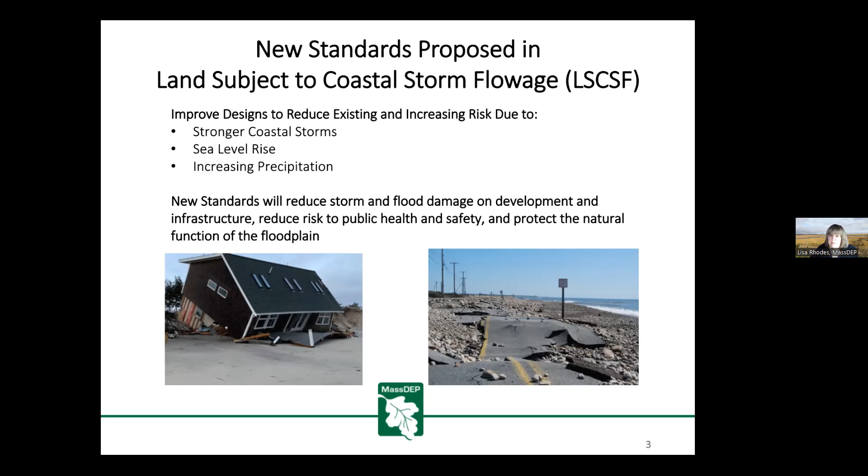Next slide. So just to quickly go over the need for these regulations, they're intended to improve designs to reduce existing and increasing risk due to stronger coastal storms, sea level rise, and increasing precipitation that we've been seeing. The new standards will reduce storm and flood damage on development and infrastructure, and it will reduce risk to public health and safety. And most importantly, for these regulations, it's intended to protect the natural function of the floodplain to help provide these functions. Next.

And so some of you may know that we've been working on developing standards for the land subject to coastal storm flowage for many years. It's been a wetland resource area in the wetlands regulations since the very beginning, but we've never had specific standards for it. And it's becoming more and more important to have that. And we've learned over the years that having strong standards in land subject to coastal storm flowage is not just environmentally important, but it makes economic sense, and it's important to maintain the high economic status of Massachusetts.

And I refer to an article in Commonwealth Magazine in October of 2022, where they referred to the big three credit rating agencies that had mostly good things to say about the Massachusetts economy, but pointed to a vulnerability based on our potential for coastal storms and flooding in Massachusetts. And specifically, they referred to the S&P rating in 2022, where they said that they consider Massachusetts environmental risks moderately negative in the credit rating because of coastal exposure, specifically in the combined Boston and Cape Cod area, exposing the state to significant economic disruption following a high impact event.

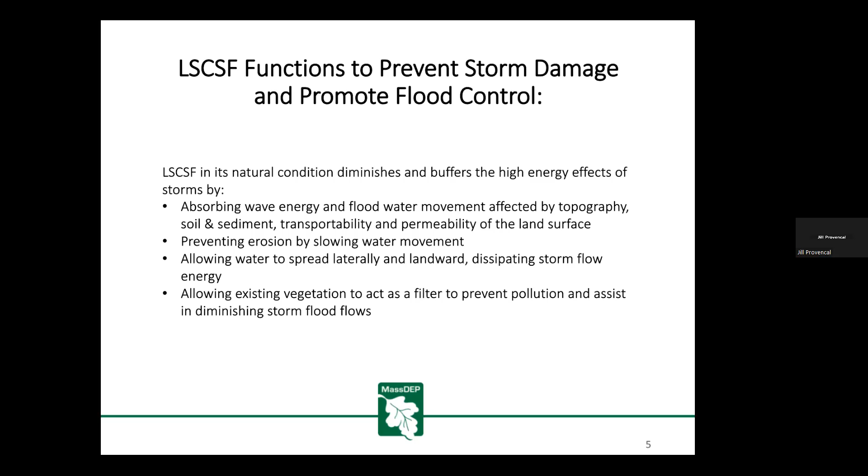Good evening, everyone. So as Lisa mentioned, land subject to coastal storm flowage is a coastal resource area that has the ability to diminish and buffer the high energy effects of storms by absorbing wave energy and flood water, reducing erosion, and dissipating storm flow energy. So the LSCSF standards are based on the FEMA flood zones.

So within LSCSF, we have the velocity zone, or V zone, that's also known as the coastal high hazard area. The V zone boundaries are determined by reference to the currently effective or preliminary FIRM map prepared by FEMA. And these areas are subject to high velocity wave action from storms and have a projected wave height of 3 feet or greater, or at least 3 feet of runup.

Then landward of the velocity zone is the MoWA, or area of moderate wave action, also considered a high hazard area of the A zone. These areas experience wave heights between 1.5 feet and 3 feet, storm surge, and wave runup.

And then landward of the MoWA is the MiWA, or area of minimal wave action, also located within the A zone. And this area is considered the lower hazard portion of the A zone and is subject to wave heights less than 1.5 feet during the 1% annual chance flood. And then the boundary you see here is the LiMWA, or limit of moderate wave action, and that is between the MiWA and the MoWA.

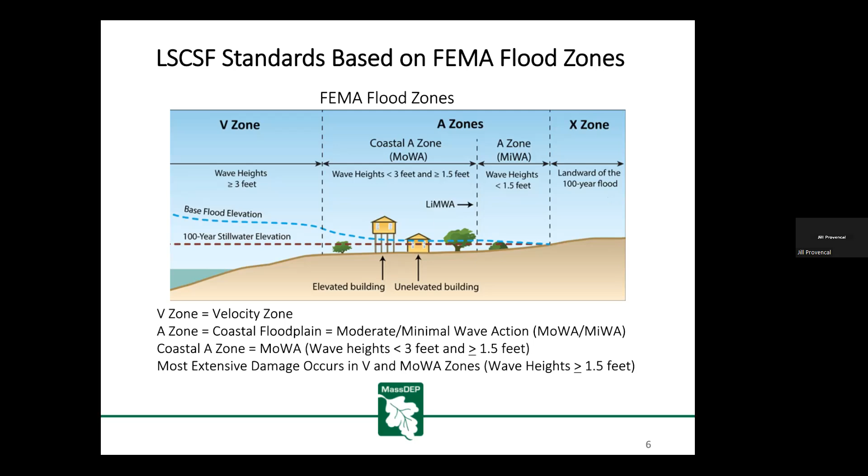And one thing I want to note is that the complete up-to-date LiMWA lines are only available through the FEMA Flood Map Service Center as part of the National Flood Hazard Layer, and they are not shown on MassGIS or other state viewers. And then we have the area landward of the MiWA, which is the X zone. This area is currently not located within the FEMA 1% chance floodplain.

So areas along the coast of Massachusetts primarily consist of protective coastal reservations, natural wetland resource areas, and rural to highly urbanized development. And each of these areas, regardless of its present landscape, is subject to erosion, scour, and damage from coastal storm events. So, learning from past storms.

One source we look to is FEMA's Mitigation Assessment Teams, or MATs, who conduct engineering analysis after major natural disasters to assess damage to government facilities, homes, businesses, and other structures, and determine the causes of structural failures and successes, with the goal of learning exactly what happened and why, and how to reduce disaster damage in the future. What we can take away from this analysis can assist us in how we look at rebuilding efforts, new construction, building code policies, and regulations.

So in certain areas, and this is from Hurricane Sandy, the MAT found that flow channelization tends to be highly localized, and changes in elevation can facilitate flow channelization. So in this figure, the MAT report identified flow paths A, B, C, and D coming in through here. This is flow path A coming in through here, and flow channel A resulted in washing this house back into the bay.

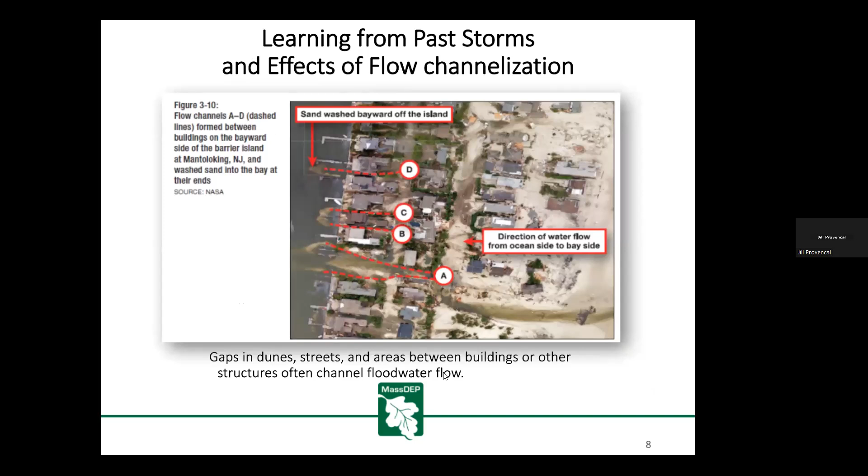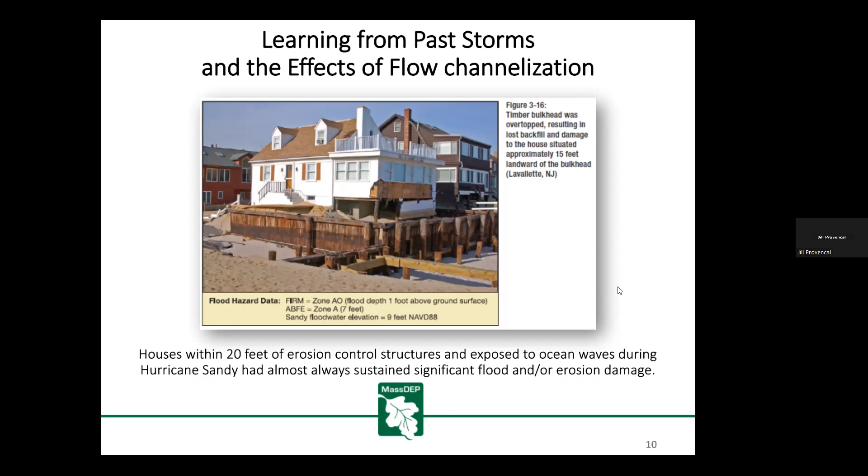And then flow channels B, C, and D, you can see this home here. These flow channels resulted in undermining foundations and causing the collapse of houses through these channels on the side. And the Hurricane Sandy MAT also found that buildings within 20 feet of erosion control structures exposed to ocean waves almost always sustained significant flood and/or erosion damage.

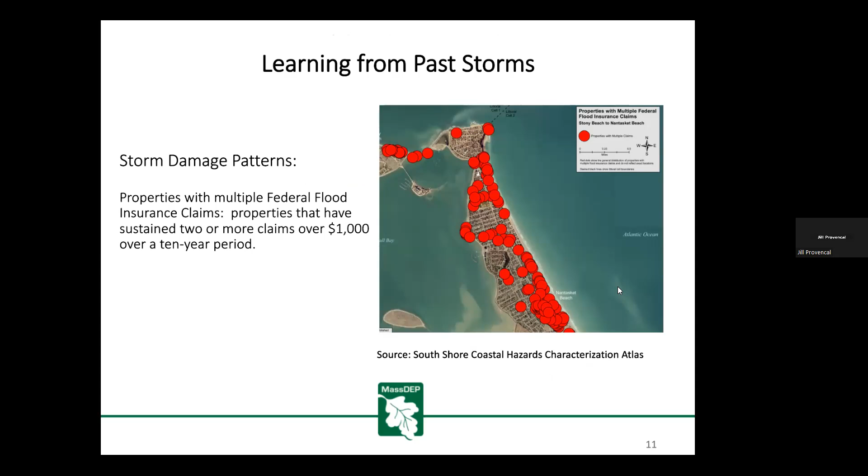Another source that we use, including but not limited to, is the federal flood insurance claim maps, on which we can see areas of repetitive damage from storm events. So before I pass it on to Pam, I just want to say, observations, including but not limited to those documented by FEMA, MassDEP, and through our Mass Coastal Storm Team, as I mentioned, we've been a little bit busy the last week or so, are reshaping how we think about development and redevelopment within LSCSF.

And we really are hopeful that through these draft regulations, we can utilize what we have learned and adapt and change past practices within LSCSF and focus on utilizing this resource area and other wetland resource areas to our advantage by restoring and preserving its capacity to provide storm damage prevention and flood control.

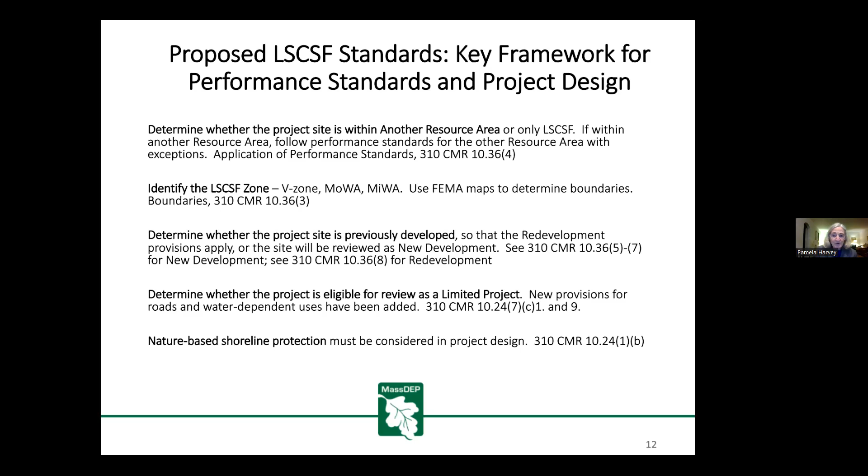Okay, so this is the provision that covers the question of what performance standards apply. You'll find it at 310 CMR 10.36(4). The basic rule is that where land subject to coastal storm flowage overlaps another resource area, you apply the performance standards for that other resource area, except for these important standards, the first two that go to the elevation and height of buildings, and importantly, a prohibition on new buildings in the velocity zone, even on open piles. And within the moderate wave action area, buildings have to be elevated under the building code for the other resource area, dune or barrier beach, or under these standards, whichever is higher. So that elevation standard applies generally, even if there is an overlapping second resource area involved.

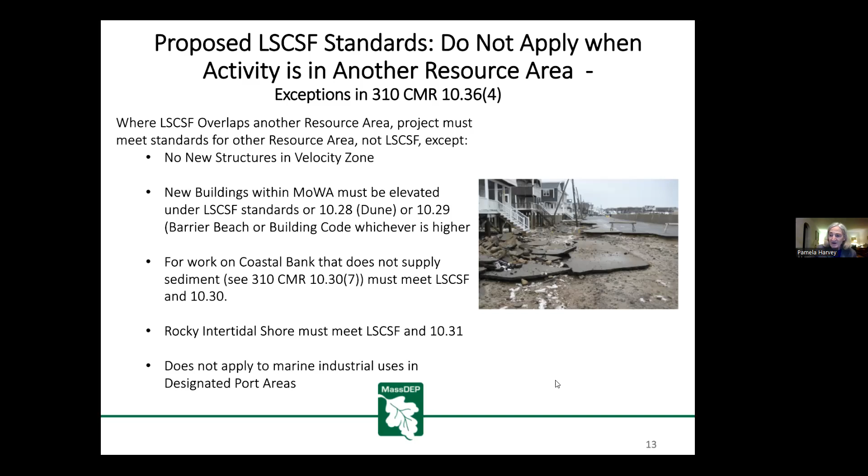And then three other circumstances. There's a particular provision about coastal bank, at 10.30, where coastal bank doesn't supply sediment, and in that circumstance the land subject to coastal storm flowage performance standards also will apply. The same anywhere within a rocky intertidal shore; both standards apply. And finally, the standards do not apply to marine industrial uses within a designated port area. Next slide.

Okay, so the regulations are set up consistently with the other coastal resource areas and the inland ones too, though these are specific to land subject to coastal storm flowage, beginning with a preamble that explains the functions and characteristics of this area and the effects of development, which Jill gave an excellent overview of, then the characteristics of land subject to coastal storm flowage, and then the presumption of significance to flood control and storm damage prevention.

And the significance is presumed within the velocity zone and the moderate wave action zone. Again, those are the areas with extensive wave energy and where the impacts are greatest. There is a definition section in this at 10.36, which again is our new portion of the regulations for this resource area. And there are some terms that are only used there, so we've added some in.

It's important to note that there are terms used which are also defined in the general definition section at the beginning of the regulations, and also in the beginning of the coastal regulations. So you may need to look in more than one place to find a definition.

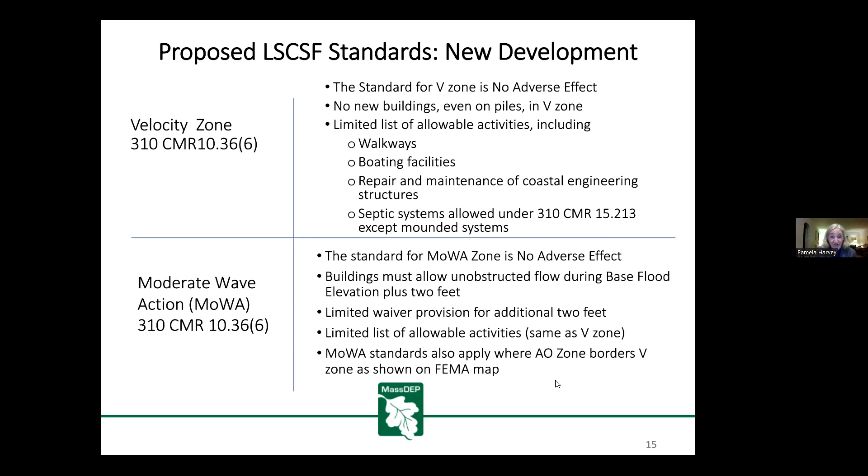Where buildings will be allowed, there are some additional provisions that go to being sure that the building is set back as far as it can, to try to have permeable surface, and so that there's as little disturbance to the vegetation on site as possible, to try to keep the resource area and preserve its flood control functions. Okay, next slide.

Okay, now we're in new development or undeveloped sites, and for the minimal wave action zone. Again, this is where waves are less than 1.5 feet. And here, buildings do have to be elevated. This is also true under the building code. They have to be elevated on either piles or solid foundations.

And there is a provision that would allow the issuing authority, if there's a lot of wave action on the site and when it's close to another resource area, to require elevation on piles. But often in the minimal wave action zone, they'll be elevated, but on solid foundations. And then there are some other performance standards for the minimal wave action area.

Including provisions so that there won't be redirection of flow, and there's also some language about trying to avoid, where there's a circumstance with a confined basin or other topographic feature that's going to hold flood water, to be sure that its water is not routed there. Any kind of circumstances where there would be an impediment to return flow.

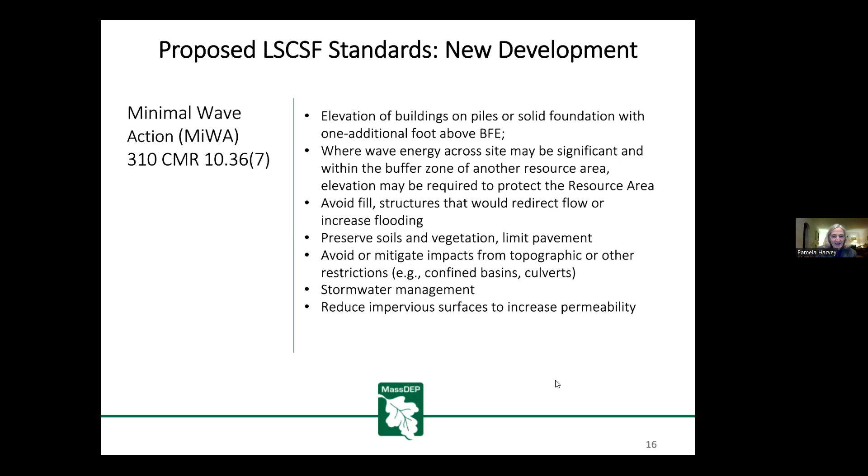Okay, turning now to redevelopment. Again, this will apply probably fairly commonly, just because of the amount of development in land subject to coastal storm flowage. The standard here is improve existing conditions, and redevelopment is just areas where the redevelopment would be replacement, rehabilitation, or expansion of existing structures.

A previously developed site would be a site with structures and fill and pavement and impediments to flow. So it's quite similar to the redevelopment provisions that we have for the riverfront area, and there are different requirements here depending on whether or not it's in the V zone, which has tighter standards, versus the moderate wave action zone. Importantly, there's an exemption for historic structures. There are additional requirements for being sure there's stormwater management.

And then also in the redevelopment section, in areas where impervious surfaces have predominantly replaced natural floodplain functions, there are two provisions that would allow structural flood control. One is for the minimal wave action zone, where there's a provision that would allow placement of fill for flood control, where they were thinking berms. And then for the velocity zone or the moderate wave action zone, there's a provision that would allow elevation of existing seawalls or construction of berms for flood control.

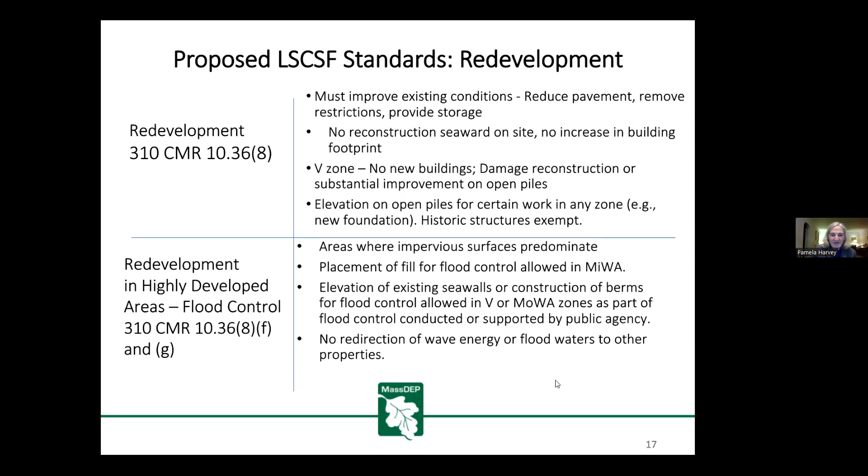Okay, just two final things on land subject to coastal storm flowage. There is a provision about salt marsh and dune migration, and the purpose of this provision is to allow a landowner to do work that would support salt marsh or dune migration onto their land subject to coastal storm flowage. So it could be within the buffer zone of those areas. We want to be sure that there's no adverse impact on those areas or on neighboring properties because of this work. But again, it could be a passive or assisted migration, depending on what the landowner wants to do.

It just seemed like there was an opportunity to encourage this kind of work. And if property owners think about it, they probably will be better off having a dune or some salt marsh because of the buffering capacities they offer, rather than just open lawn or other things they might be doing with their land subject to coastal storm flowage. They get more protection of structures through salt marsh or dune. And then finally, there's a provision for protection of rare species, which is the same as in the other coastal resource areas. Okay, next slide.

Hey, Pam, need to do a time check, maybe 3 more minutes. Okay, yes, I'll be very quick here.

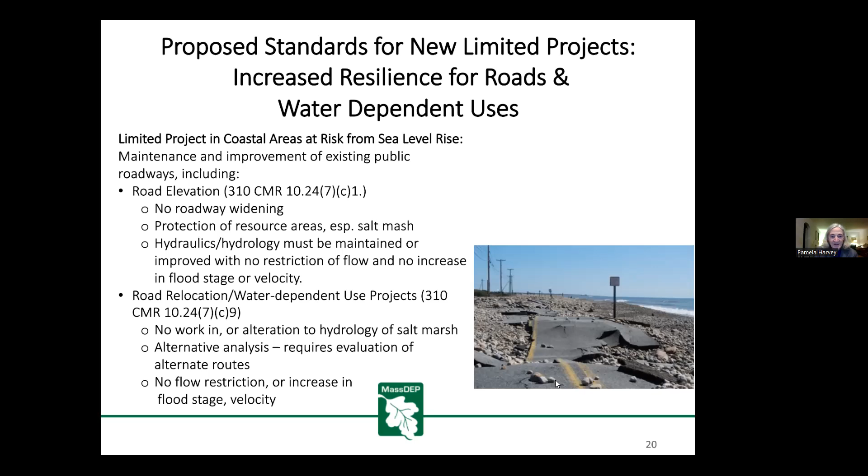Okay, next slide. Okay, last but not least, we have a pathway for research on climate resilience. There was an interest by the scientific community about a provision that would allow this work to go forward and have a particular regulatory pathway for it. So we did establish this. Those of you who are interested in doing scientific research, you should take a look at it.

There's a fair amount of detail in it, and it has limitations on the scope of impacts and the duration and requirements for the ability to do restoration if things aren't working out as planned. These are provisions that are in the early part of the regulations at 10.05, so you'll find them there. Okay, that's the end of my session. Next slide.

Thank you, Pam. So just a quick update on the schedule. As you know, we published these proposed regulations on December 22nd. We have one more info session on January 23rd at 1 o'clock. And then we have 3 public hearings scheduled for January 31st and February 1st, where we will just take public comments. The public comments are due on March 1st. So we want to provide enough time for people to look through everything.

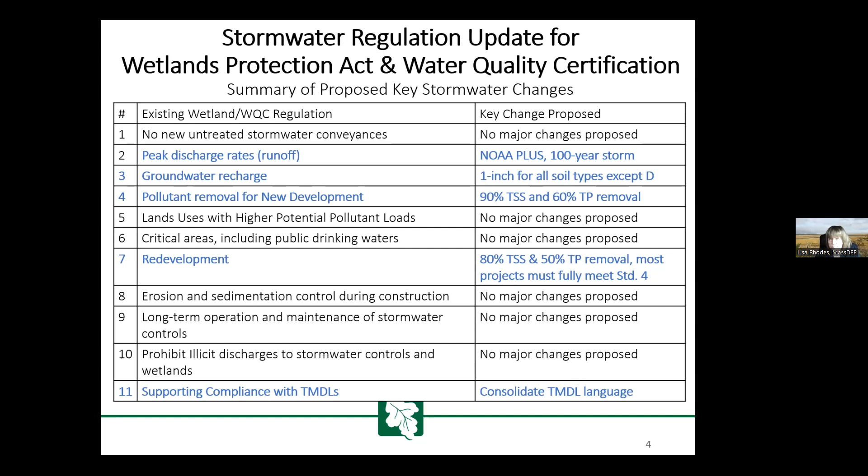These are the stormwater standards. If you're familiar with them, there's currently 10. The ones that are highlighted in blue are the main ones that are going to change, and we'll be discussing those today. Standard 2 is for peak discharge rates. Standard 3 is for groundwater recharge. Standard 4 is pollutant removal for new development. And then standard 7 is for redevelopment. And we are proposing a new standard to improve protection of waters that currently are assigned a designation of total maximum daily load or impaired waters. Next slide, Dave.

Okay, so starting with standard 2, standard 2 is for peak runoff attenuation, and the standard basically requires that post-development peak discharge rates do not exceed pre-development discharge rates. Currently, this standard is based on precipitation data that is 60 years old. It's from a very outdated document referred to as Technical Paper 40, and it badly needs to be updated. So the key proposal for this standard is to discontinue use of the TP40, the 60-year-old data, and adopt the new NOAA Atlas 14 precipitation data.

Except rather than adopting the fitted value from the NOAA Atlas or the average value, we are proposing to adopt the 90% of the published upper confidence interval as the data that you use to design for peak for this standard, and that we refer to as NOAA Plus. So NOAA Plus is the 90% of the published upper confidence interval in the NOAA Precipitation Atlas. We are also proposing to require design for the 2, 10, and 100-year storm events.

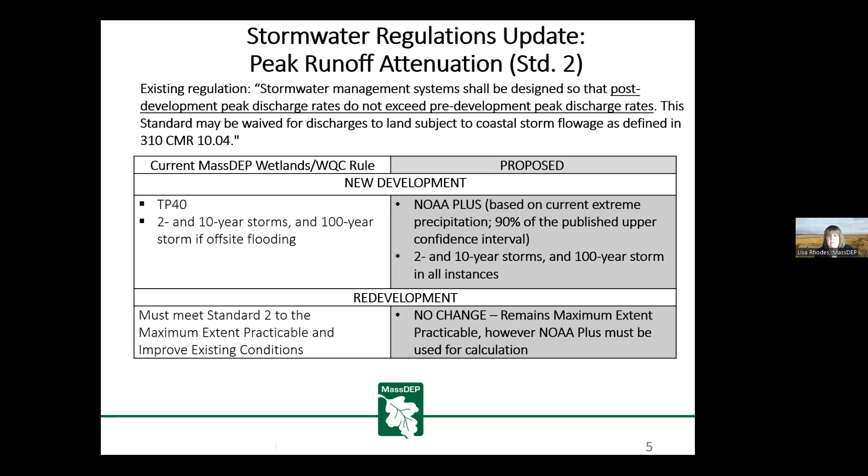For stormwater standard 3, that's the recharge standard, which basically requires that annual recharge from the post-development site shall approximate annual recharge from the pre-development site based on soil type. So the current recharge standard has soil recharge standards for each soil, A through D. The proposed requirement for new development is that A, B, and C soils must recharge 1 inch if you're using the static method. And for D soils, it would be 1 inch to the maximum extent practicable.

Additional methods are allowed to be used for the recharge standard, such as the dynamic method and the continuous simulation method. If using those methods, they would be presumed to meet the standard of the 1 inch using the static method. For redevelopment for the recharge standard, we are proposing to keep that as a maximum extent practicable standard, only it would be maximum extent practicable of 1 inch of recharge, except for D soils. And we're also proposing to allow offsite mitigation for redevelopment for the recharge standard. Next slide, Dave.

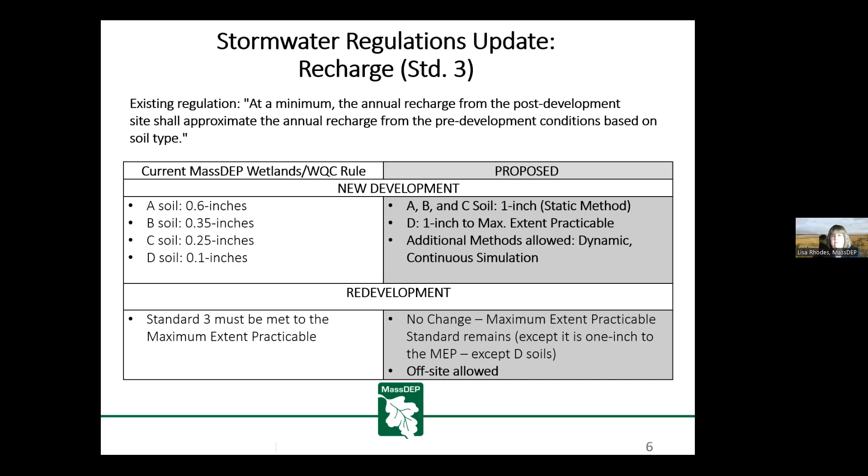Now for standard 4, this is the pollutant removal standard, and this is the one that was most important to try to align with EPA to the extent possible, so that the two requirements are similar. The current standard for pollutant removal is to remove 80% of the annual load of total suspended solids. And the proposal is to align with the EPA MS4 general permit by requiring removal of 90% total suspended solids and 60% total phosphorus for new development.

And different from EPA, offsite mitigation would not be allowed, since the assumption is you're starting from a new site which could be designed to accommodate the stormwater requirement.

For redevelopment, we are also proposing to align with EPA and require removal of 80% total suspended solids and 50% total phosphorus. And although this standard for redevelopment is currently at maximum extent practicable, we are proposing to change that and require that most projects fully meet this standard, the pollutant removal standard, and we'll discuss the reasons for that in a few minutes.

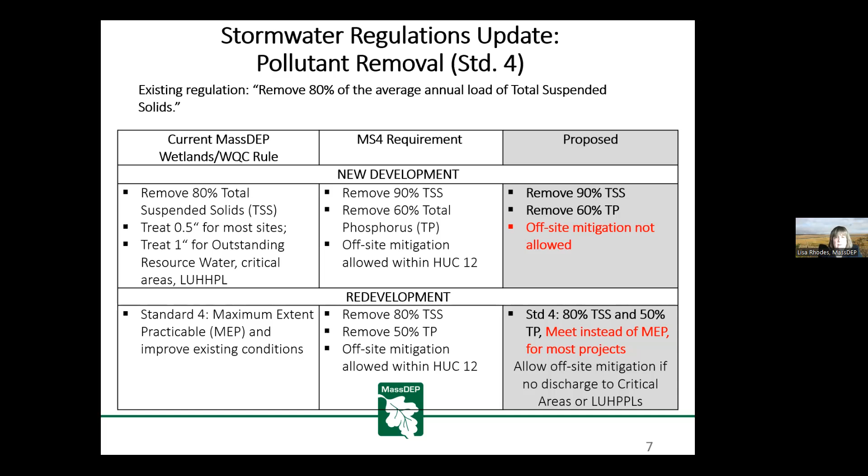Next slide. We're going to go into a little bit of a deeper dive on these standards I just talked about. I'm going to turn it over to Tom McGuire to talk about the NOAA Plus component of the peak rate attenuation standard. Tom, you ready?

Yes, as Lisa indicated, we currently rely on TP40 or Technical Paper 40. Just to give you an idea, it was put together by something called the U.S. Weather Bureau, the predecessor agency to the National Weather Service. That's how old it is. It's paper. There's about 2 or 3 isohyets, which are sort of lines of equal precipitation in Massachusetts, so it's very coarse. We're proposing to replace it with a variation of NOAA 14, which is a web-based interface.

You can get precipitation statistics for any point in space in Massachusetts, so it's much more reliable in terms of interpolating between stations. We're proposing to use the upper end, though, the upper confidence, rather than just rely on the fitted value as Lisa indicated. Next slide.

This is an example of how one would get NOAA 14 when one clicks on a point in space, let's say Worcester, Massachusetts. It comes up with it. You get a table. The dark value is the fitted value, and the two values below that in parentheses are the lower confidence to the upper confidence. What we're seeing here is a lot of the storms are toward the upper end versus the fitted value.

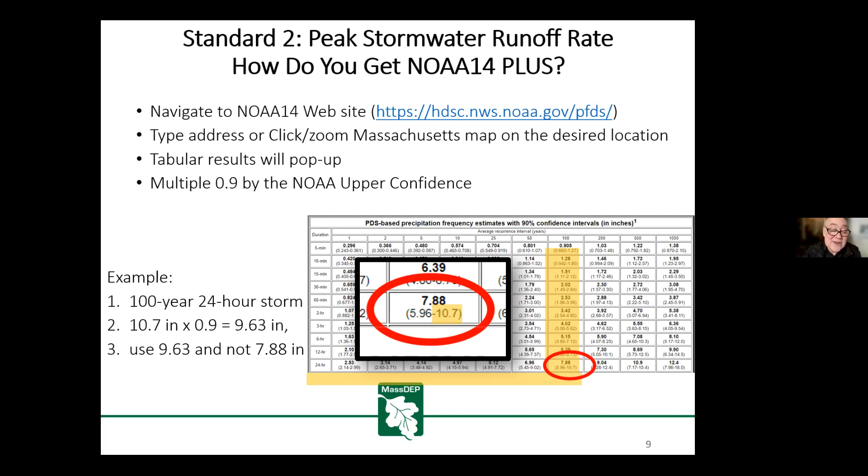We're also proposing to make the same change in bordering land subject to flooding. Right now, we rely on the FEMA mapping, and then in the absence of the FEMA flood profile, we rely on the largest event observed or recorded, and then an engineering analysis in the event of a conflict, relying on a 7-inch storm in 24 hours.

So we're proposing to keep everything the same, rely on the FEMA mapping, rely on the largest event observed or recorded, and then in the conflict, instead of using the 7-inch storm in 24 hours, we'd rely on the NOAA plus storm. Turn it over to Dave Roman now.

Okay, thanks, Tom. So now we'll go into standard 3 and talk about stormwater recharge. So as Lisa mentioned, in the current standard, the recharge depth is based on hydrologic soil groups. So for example, for the static method, the recharge depth would be 0.6 inches for soil group A, 0.1 inches for soil group D. The proposed recharge depth is now 1 inch for all soil groups, except for D, which would be to the maximum extent practicable.

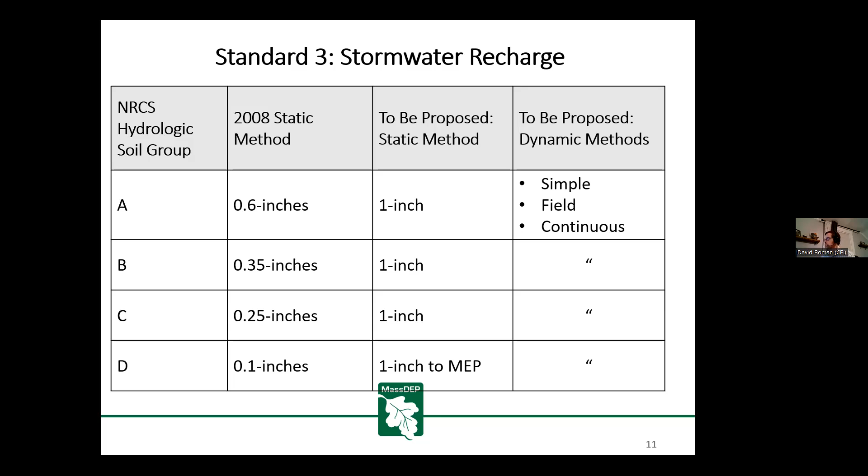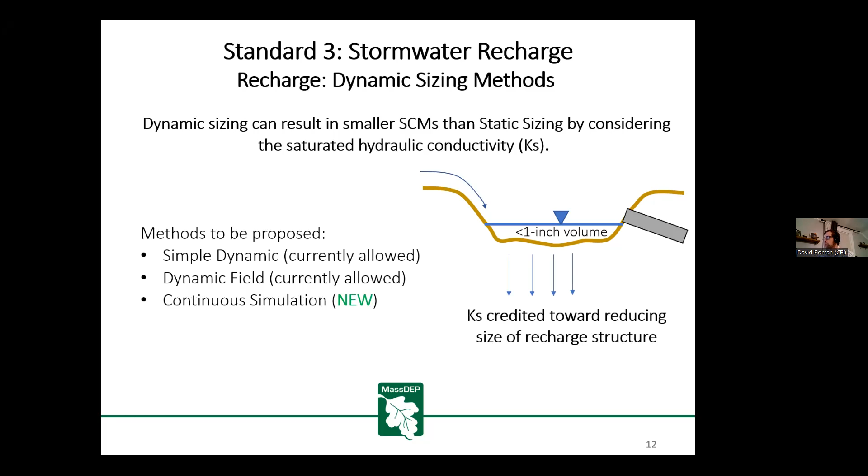There are some dynamic methods that can be used to reduce this recharge depth. So dynamic sizing can result in smaller SCMs than static sizing because it takes into account the saturated hydraulic conductivity. So the current handbook allows 2 different dynamic methods. These are the simple dynamic method and the dynamic field method. There is a proposed new method called the continuous simulation method. And this is a spreadsheet-based method which looks at long-term rainfall records and is used to size the recharge dynamically.

One thing to note is that MassDEP did look at this 1-inch target recharge value based on some questions from the advisory committee. And as a result of that, a couple of different analyses were looked at. One was the base flow separation analysis, and one was the continuous rainfall simulation. And really, the whole entire goal of this is to look and see how a recharge target can be set to mimic

pre-development recharge values. So based on this result, DEP is considering changing this recommendation from 1 inch to 0.8 inches and seeking comments on the results of these. So there's a notice to reviewers document posted on the website with more information, and you can also find those 2 analyses.

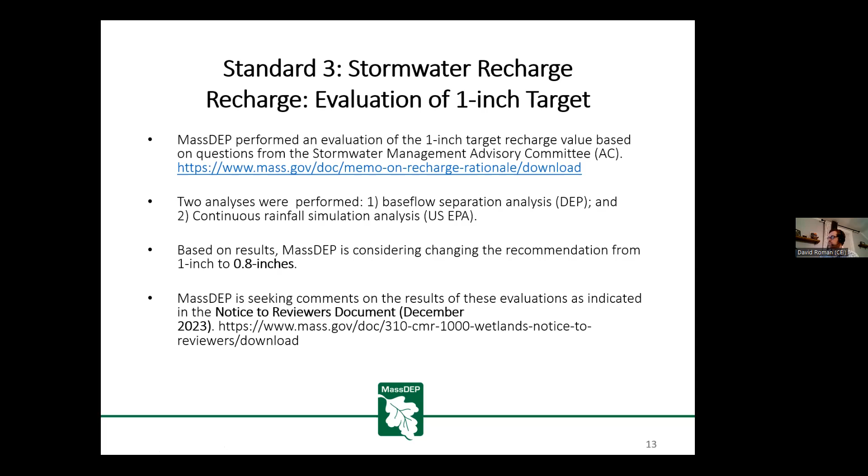And I'll pass it over to Liz to talk about Standard 4 and pollutant removal. Thanks, Dave. I am Liz Clark. I'm going to walk you through the changes to Standard 4 and the new Standard 11.

Standard 4 was changed with 2 main goals in mind. One, to improve the water quality from the stormwater runoff coming off of our post-developed, new developed and redeveloped sites. In the past 4 to 5 years, we've seen an additional 224 water bodies in the Commonwealth be designated as impaired due to pollutants that are commonly found in stormwater runoff.

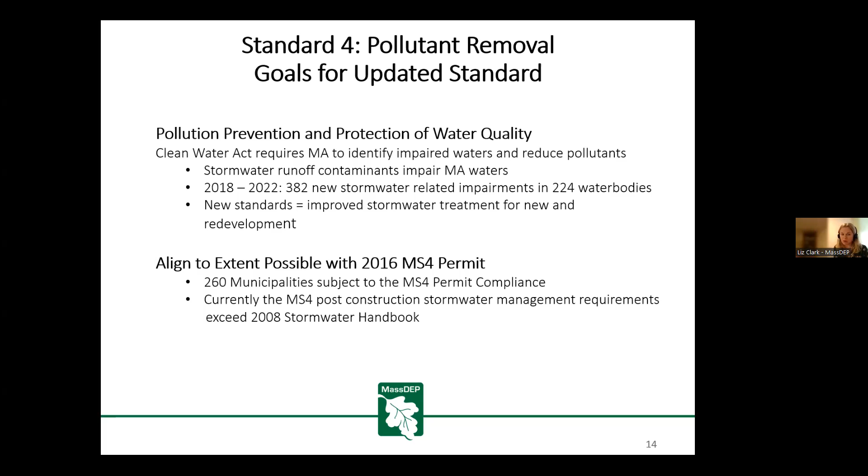And additionally, as Lisa mentioned, the other goal is to align to the extent possible with the 2016 small MS4 permit. Currently, about 74% of the communities in Massachusetts are subject to the permit, and the post-developed stormwater management requirements exceed the 2008 stormwater handbook. Next slide.

So what has changed? The current standard requires 80% TSS removal, or total suspended solids removal, for new development, and on redevelopment to meet the 80% TSS removal to the maximum extent practicable. We are increasing that standard, and for new development, we're going to a 90% TSS removal, and we're adding in a 60% average annual load reduction of total phosphorus.

For redevelopment, these standards are moving from a maximum extent practicable standard to now a fully meets. So we're going to 80% TSS removal and 50% total phosphorus removal for redevelopment projects. There is a provision for offsite mitigation in the event that these standards can't be met on-site for redevelopment projects that do not discharge to a critical area and that are not designated as land use with higher potential pollutant load.

When you do evaluate your offsite mitigation, you're going to start kind of close to your site and then gradually expand out to the maximum of a HUC 12, or hydrologic unit code. And those HUC 12 watersheds are available on MassMapper if you wanted to see them. Next slide.

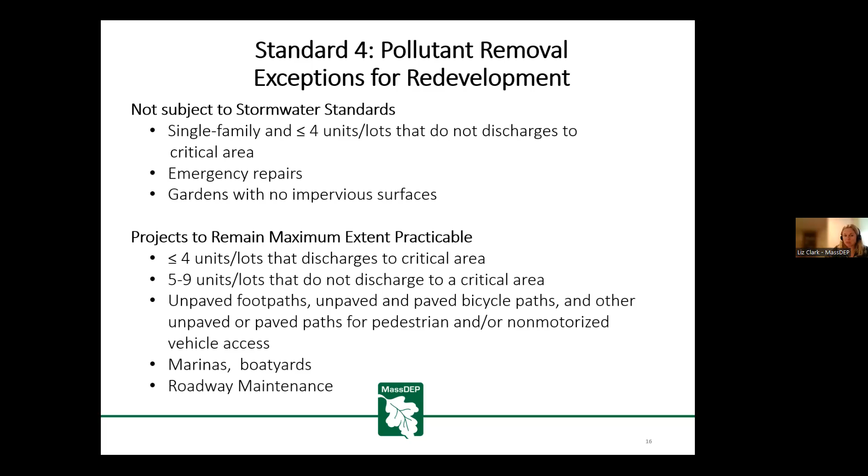There are a few categories of projects that can still comply to the maximum extent practicable. Those are projects with 4 residential units or lots or less that discharge to a critical area, 5 to 9 residential units or lots that do not discharge to a critical area, unpaved paths such as footpaths or multi-use paths, bicycle paths, anything that's not subject to vehicle access, marinas, boatyards, and roadway maintenance. Next slide.

So complying with the standard, there are 3 options listed in the revised handbook. The first is utilizing environmentally sensitive site design credits, and we'll go over those in just a minute. There are 7 available. In the event that you cannot use those, you'd be moving to options 2 and 3. We have the EPA performance curves now included in Appendix B of the draft Stormwater Handbook. These were included in the current MS4 permit in Appendix F, so I think a lot of you may be familiar with them. And then, in the event that there isn't a performance curve, we can move to the MassDEP pollutant removal credits, such as getting 25% TSS removal for a catch basin.

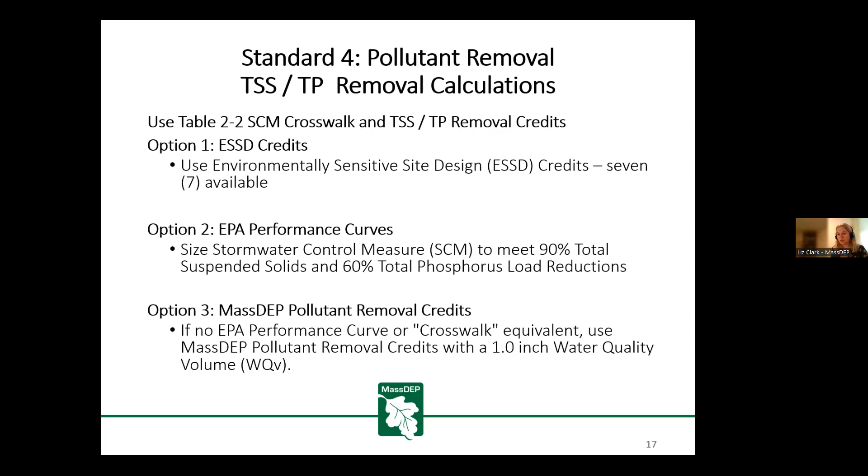And there is a Table 2-2 in the handbook that has a crosswalk that's going to show you which methodology you can use for the sizing. Next slide. So this is an example of the EPA performance curves. Again, these are all included in Appendix B. The dark blue line shown on the screen is our total suspended solids removal. The darker orange one here is our total phosphorus.

And on our vertical axis, you see the pollutant load reduction by percentage. And on the horizontal, that is the depth of runoff across the impervious area that is treated by the stormwater control measure. So when you see the 0.4, that's 0.4 inches of runoff across the impervious area. So there's 2 different ways you can look at sizing with these curves. The first is really just meeting that Standard 4, which is shown in blue here, where you're targeting the 90% TSS and the 60% total phosphorus. And you can see if we did that sizing with this stormwater control measure, we're treating 0.4 inches of runoff across the impervious area.

You can also evaluate it to meet that 1-inch recharge standard, or if you have a critical area or a LUHPPL, when you're trying to target that 1-inch water quality volume. And by doing that, you can see that our treatment rates go way up, where we're almost getting 100% of the total suspended solids and in excess of 90% on the total phosphorus. These curves also really show where you get your highest and best efficiencies, your most bang for your buck as well. Next slide.

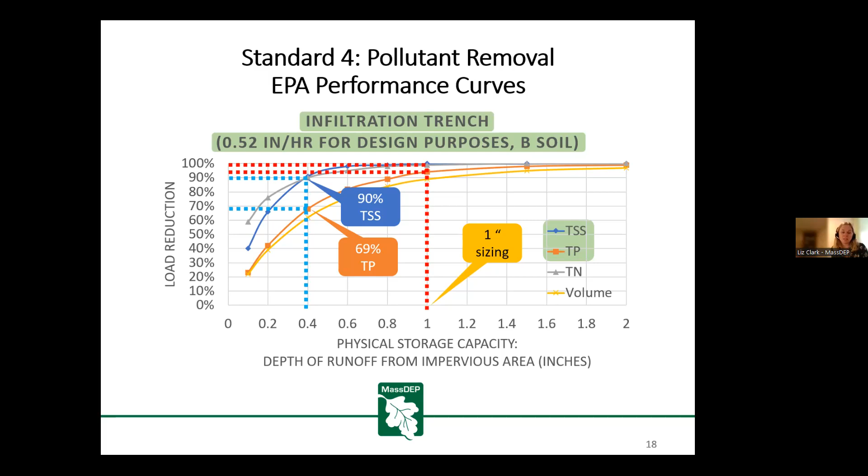So now pivoting to Standard 11. Standard 11 was also developed with the intent to protect the waters of the Commonwealth, and it applies to projects that have TMDLs that are either for nutrients, so phosphorus and nitrogen, for pathogens, which would include your fecal indicator bacteria, your fecal coliforms, your E. coli's, or your metals, zinc, cadmium, lead, aluminum, and iron. The Northeast Regional Mercury TMDL does not apply in this case.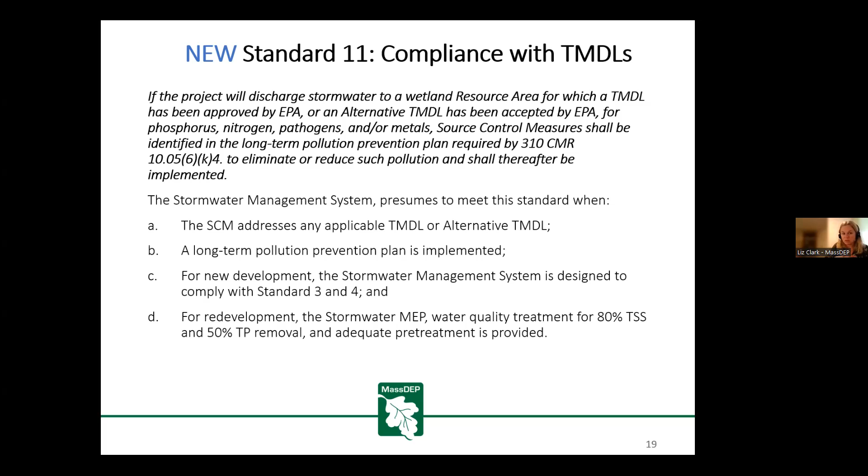So to comply with this standard, you're going to comply with standards 3 and 4, and you're going to use specific stormwater control measures to address the applicable TMDL. And you're also going to tailor your long-term pollution prevention plan to address the pollutants of concern. So if you had a nutrient TMDL that you were addressing, you would have a nutrient management plan in your long-term pollution prevention plan. Next slide.

So references, so you know if Standard 11 applies, we did develop a map that shows the TMDLs, and the link is here. And again, these slides will be posted later on. Additionally, this information can be found on MassMapper as well. Next slide.

And there is a table, table 2-6, included in the handbook, and this tells you which stormwater control measures are appropriate for which pollutant of concern. So you can see up in the top in gray, we have our pollutants of concern, TSS, total nitrogen, total phosphorus, fecal indicator bacteria, and metals. And then going down the list, it gives you a pretty clear yes or no, or in some cases, it varies if the SCM applies. With that, I'll turn it back over to Dave.

All right, thanks, Liz. So we're almost done here, getting down to the home stretch. So there is a new requirement in the proposed regulations that environmentally sensitive site design, or ESSD, and LID techniques must be used to attenuate stormwater pollutants. So the idea here is that there have been several ESSD credits that have been built to help meet this requirement. So this requirement would be used for sizing SCMs, for example, to meet the recharge standard or the pollutant removal standard.

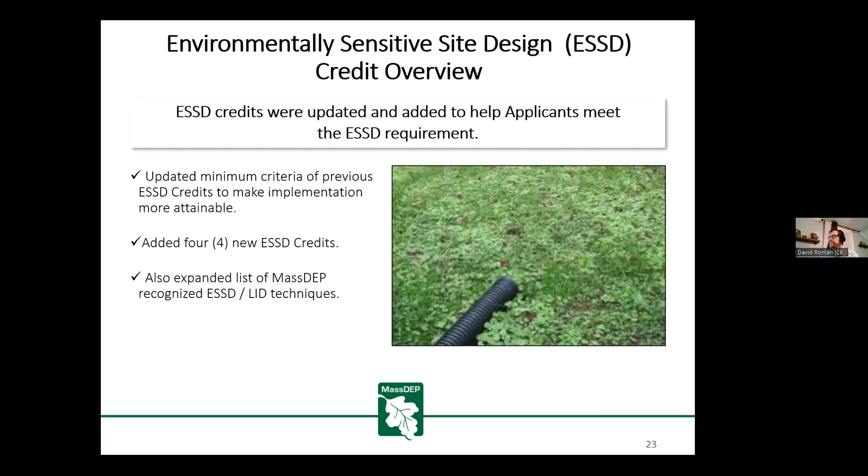So the idea here is that if a tree canopy overhangs over the impervious surface, you can run some calculations and deduct the effective impervious area from the calculation needed to meet recharge and pollutant removals. There's a new credit for redevelopment only that encourages reductions in impervious area. And then finally, credit 7 is to protect or enhance buffer areas. So really to encourage the use of buffers. This could be new buffers or it could be existing buffers.

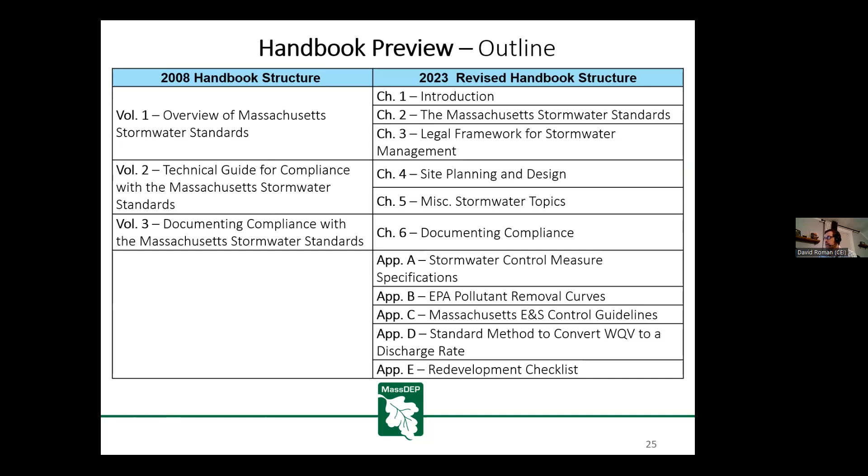So just looking into the handbook, some key things that have changed on the handbook. It's got a new cover page. There's a table of contents. There's searchable headings, figures, and tables. So essentially live links to help find things quickly.

We tried to add pop-up boxes for key information, so like what is a stormwater control measure, for example. Calculation boxes have been standardized. So for various calculations, it's all in the same format, step by step. There are summary tables to help find various information. And the overall handbook has been reformatted.

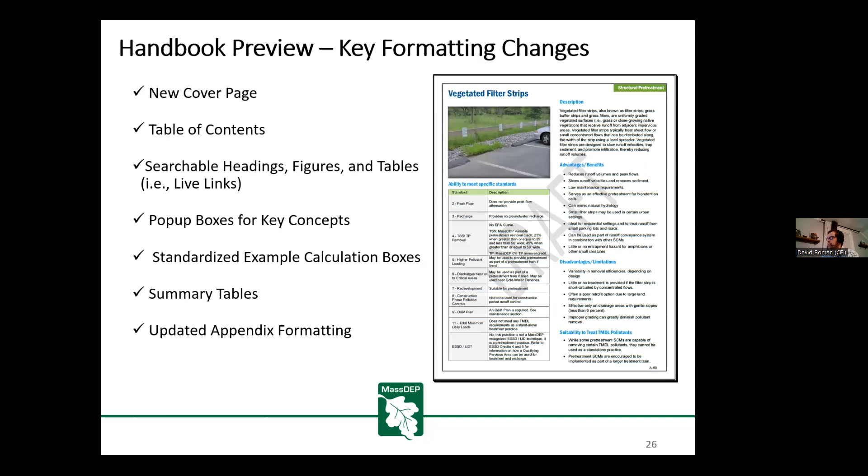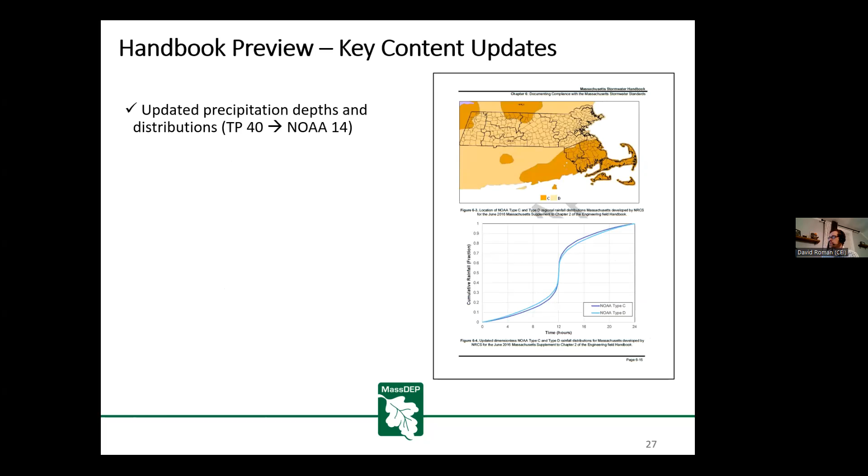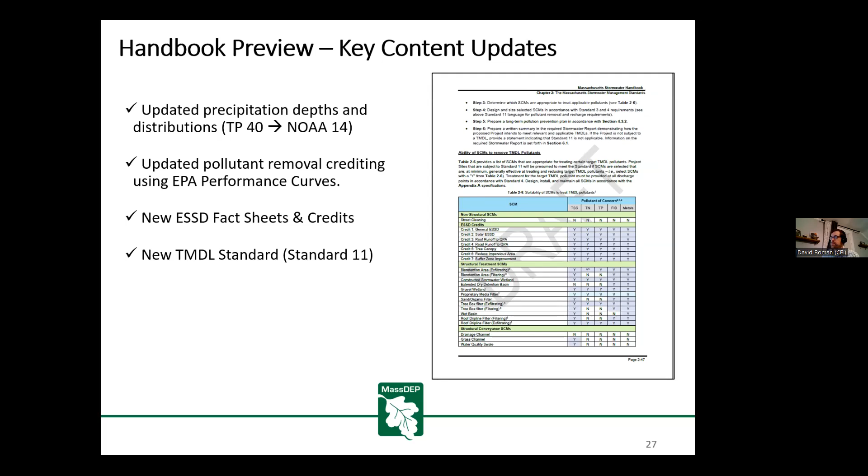There's also some content that's been updated, and this content is essentially to follow some of the major changes or the proposed changes to the regulations. A couple of the big changes here are updating how the rainfall depths are calculated, from TP 40 to NOAA Atlas 14. There is information on how to use the performance curves. There are the new ESSD fact sheets and credits. There's a whole section on the new TMDL standard 11, and a couple other things.

There are sections about the alternative analysis framework, so essentially how to use that for various requirements. There is a section on offsite mitigation for redevelopment projects. Also, we expanded some of the information on various required plans, like the construction plan, the long-term pollution prevention plan, and the O&M plans. There's a master setback table that's been added, essentially trying to put all the setbacks into one place. Also, a chapter for solar projects and highways. And with that, I'll turn it over to Lisa.

Thanks very much, Dave. Okay, so the schedule's shown here. I wanted to briefly go over it. As you might know, the regulation proposal was posted for public comment on December 22nd of 2023. We have one more public information session on Tuesday, January 23rd. We'll cover the same information, and we'll have additional questions and answers. So we encourage you to attend if you still have questions after today. And then there are 3 public hearings where we'll be taking comments, and those are on January 31st and February 1st. Next slide, Dave.

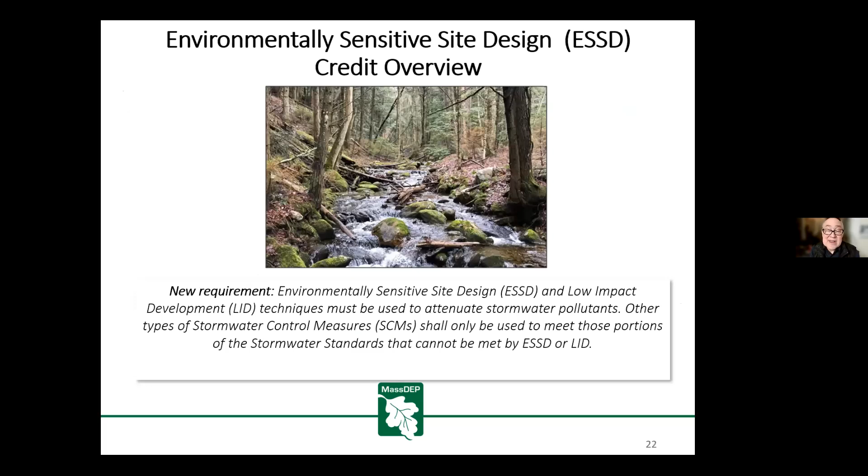So on standard 11, I want to get some input. Is it similar to the NOAA Atlas 14 kind of thing? Is DEP going to provide some kind of web-based application where you can check if it applies to your project, if I understand right, or is it different? Yeah, we have a map viewer. Liz can talk about this. We have a map viewer that's available online right now to find the TMDLs for each watershed where they're adopted.

There are 5 specific TMDLs that this applies to, and one other category, I think, if an alternative TMDL has been designated, but it's not every TMDL that might be listed in the impaired waters report. The regulation specifies 5 TMDLs, and if your site is discharging to a water designated with one of those TMDLs, that's when standard 11 would apply. To determine that, you could go to this website and see whether it applies to you.

If it does apply to you, essentially your requirements are to meet standards 3 and 4 and to use certain stormwater control measures designated for that TMDL. We have a table that tells you which stormwater control measures are usable for those TMDLs. Is that clear enough? I don't know if you want to add anything, Liz. I think you guys did a great job covering it. I think we're good. Thank you.

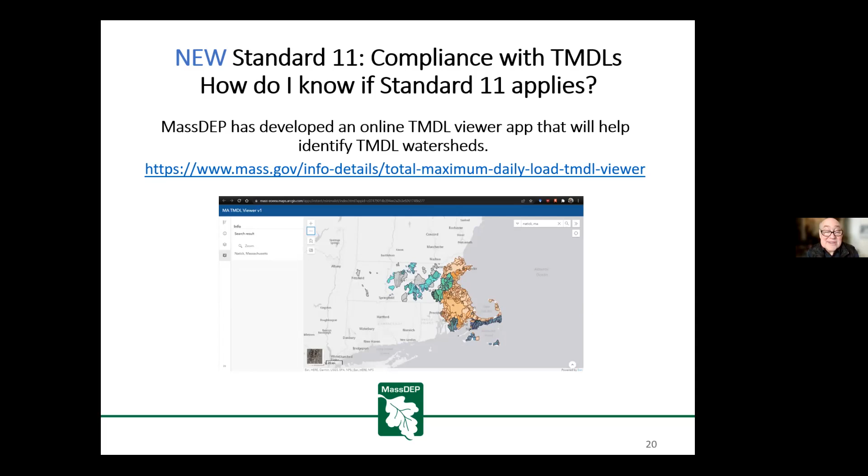There is sort of an issue with the engineering analysis because it's more related toward ponds and not rivers. So for instance, the Connecticut River, it's not really gonna work, that type of solution. It's really geared towards smaller parcels, that alternative procedure.

Okay, we have a separate project to develop a statewide hydraulic model. We're applying it first to sizing culverts. The goal is in the long term that it'd be able to be used for flood studies, but that's a good ways away. And then there's another project, the Future Stream Flow Project, that our Resilient Massachusetts Action Team is working with the USGS and Tufts University and Cornell on to project future stream flows,

the way the RMAT group has done with precipitation. So the thought is, if we could couple the future stream flow project with the statewide hydraulic model, it would allow mapping of these floodplains as we advance forward for climate change. But that's a while off. Right, but that project is being started out in Western Mass, so you might be heartened to hear that. Yeah, the pilot basin's in Western Mass. We wanted to get a basin that was not altered that much,